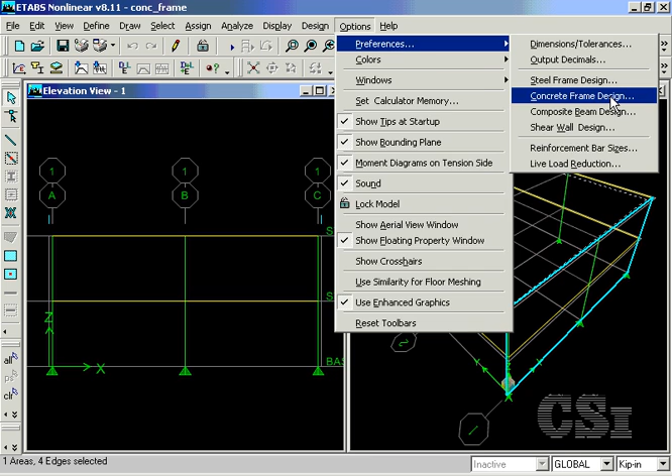Before running the design, check the Options Preferences command and review the default settings for concrete frame design. There are many options for the design codes, and for this example we will use the ACI 318-99. You should also verify that the other default values are correct.

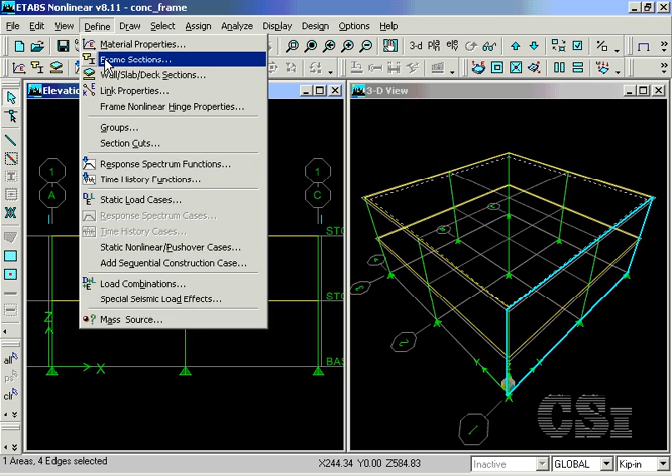Next, we define the various concrete frame sections to be used in the model. We start by defining a 24-inch diameter circular column with a concrete material property. Selecting the concrete material will allow the program to do a concrete frame design on this section.

Next, click on the Reinforcement button and make sure that the design type is set to column with circular reinforcing. Columns may be designed or checked. We will ask that this section be designed.

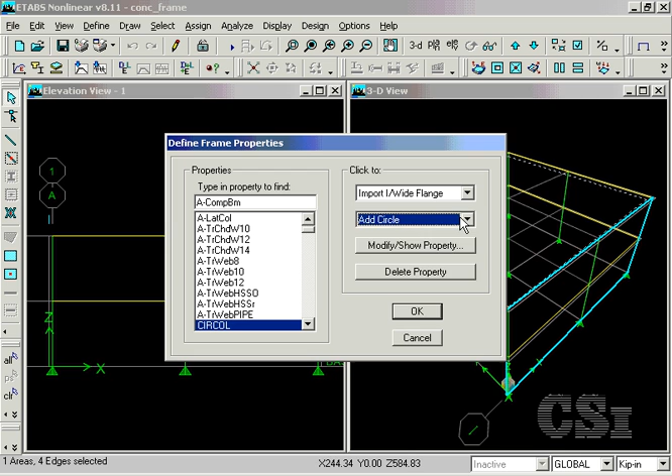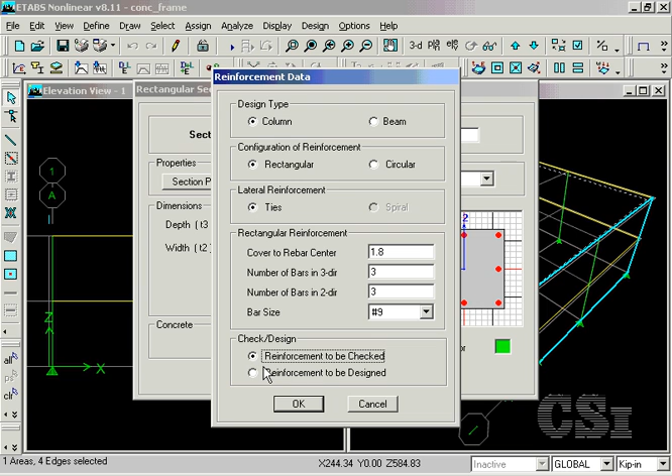Next, we will add a rectangular section for a 24-inch square column. Again, set the material to concrete and click on the Reinforcement button. This time the reinforcement pattern will be rectangular, and we will ask that the column be checked for the specified reinforcing rather than designed. For this column, a stress ratio will be reported.

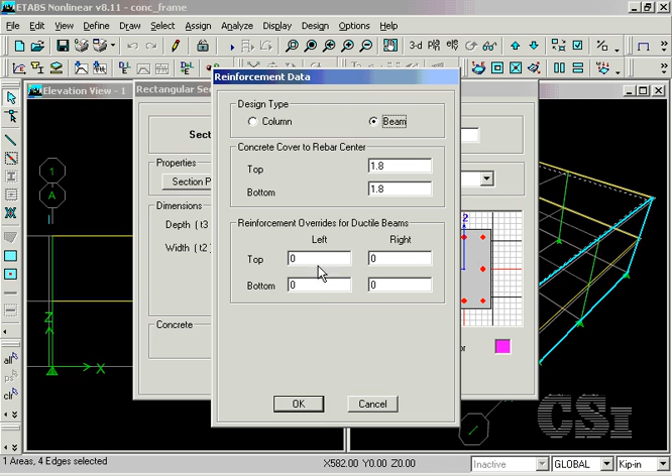Our last section will also be rectangular, but it will be a beam section rather than a column. Select concrete as the material once more and set the beam width to 12 inches. Click on Reinforcement and select the design type to be beam. Note that with the beam we no longer have the option for checking. Design for major moments and shears is the only choice.

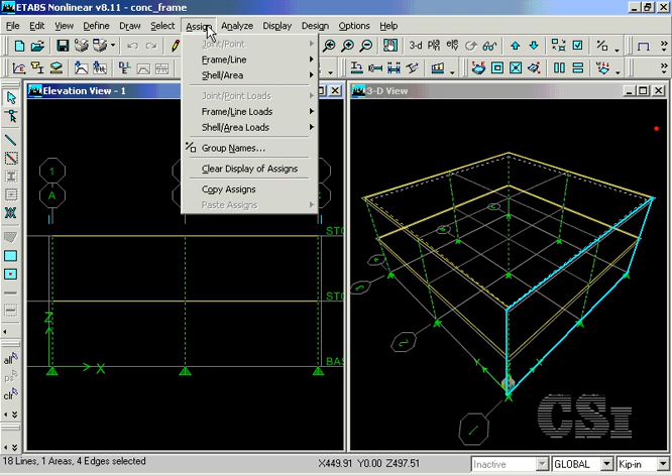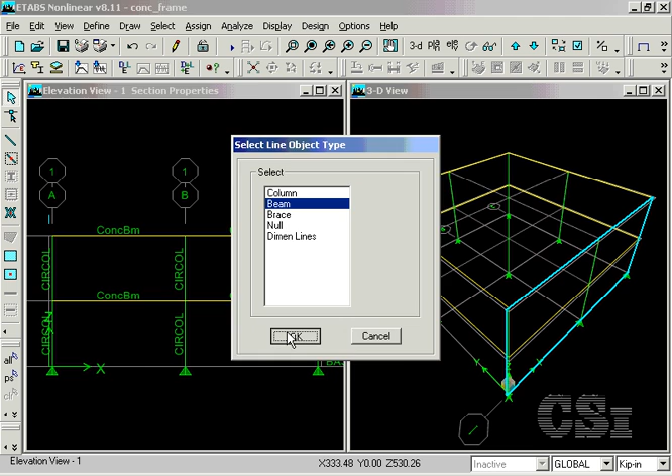Now that the sections have been defined, the next step is to assign them to the model. Start by selecting all of the column line objects and assign the circular column section to them. This is the column that we want designed. Next, select all the beam line objects and assign the rectangular beam section to them.

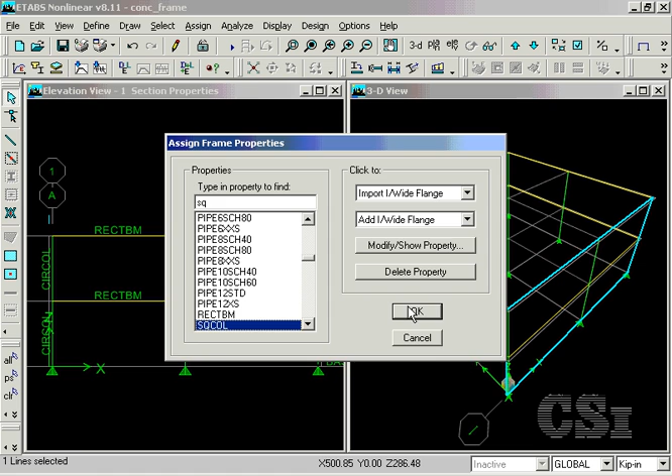Lastly, select a single column object and reassign the square column section to it so that we can see how the column check option works. At this point, we have assigned the rectangular beam which will be designed, the circular column that will also be designed, and the square column that will be checked.

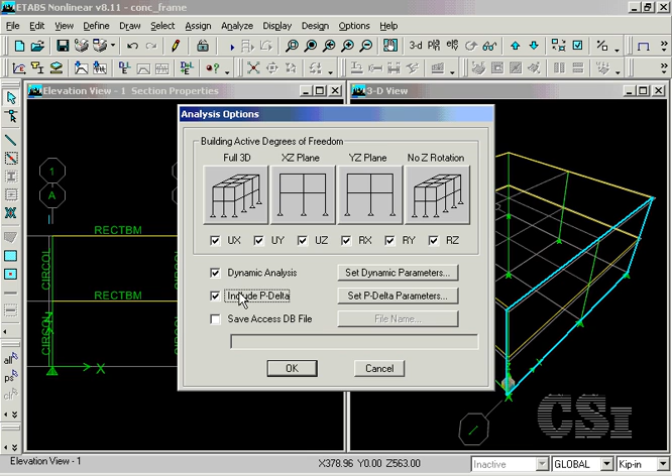We are almost ready to run the analysis, but before we do, make sure that the P-delta option is on, as this is needed to account for the global P-delta effects in the design. The local effects are included in the design algorithms. The analysis may now be run.

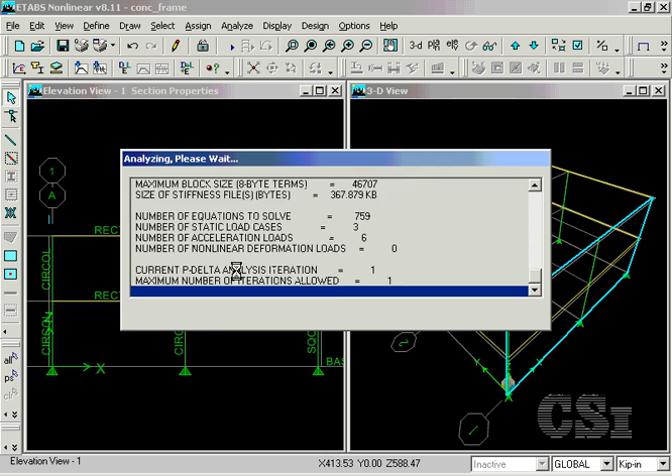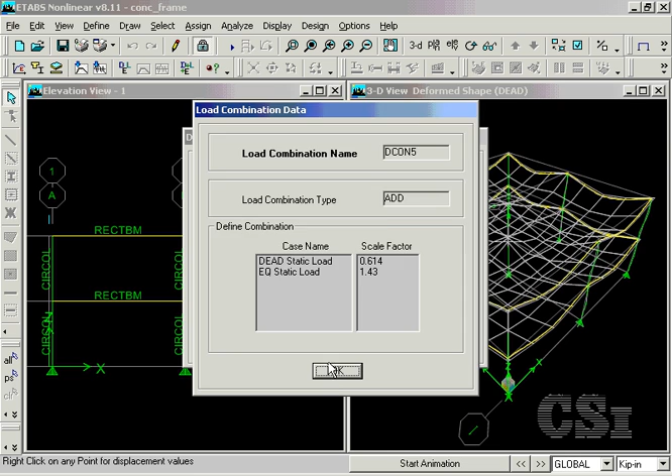With the analysis complete, we are ready to enter the design phase. A quick check of the load combinations shows the load combos that the program has automatically generated. You may view what is in these combos, or add or remove combos from the list. We are now ready to start the design check of the concrete frames.

With the design complete, we will ask the program to display the design info on the left elevation in addition to that which is shown on the 3D view. Note that the required reinforcing values are displayed for the design beams and columns, while the column that was checked shows the area of the reinforcing that the user defined.

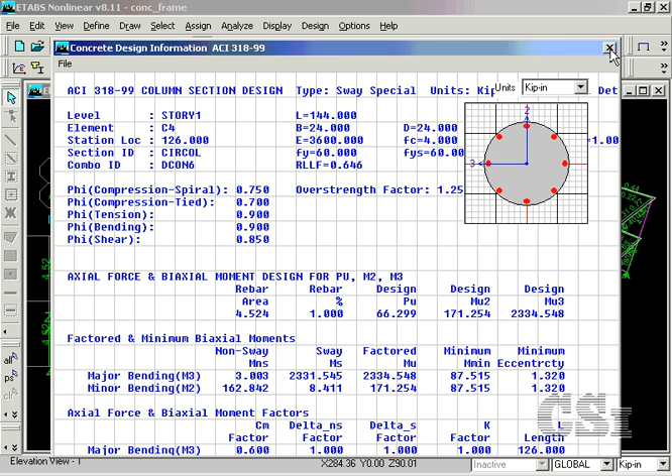A right-click on a frame object brings up a design information form, where you can review the particular design details for both flexural and shear design. Interaction surfaces for columns are also available. Similar information may also be displayed for the design beams.

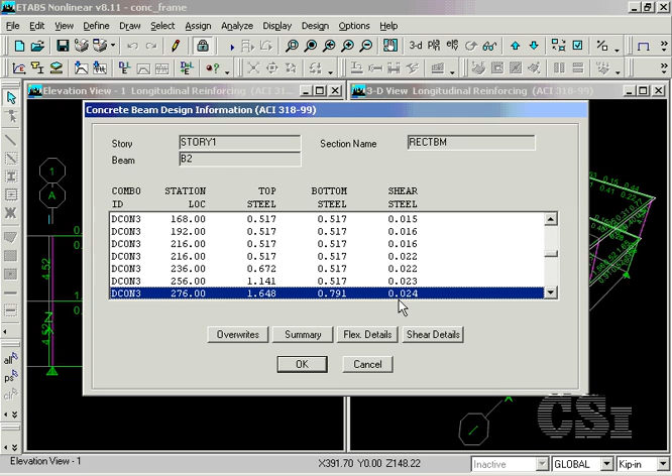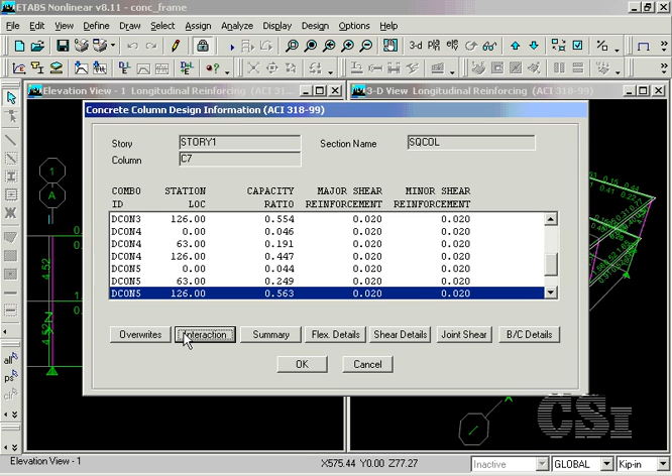A right-click on the column that was checked displays the maximum capacity ratio. This concludes this tutorial.